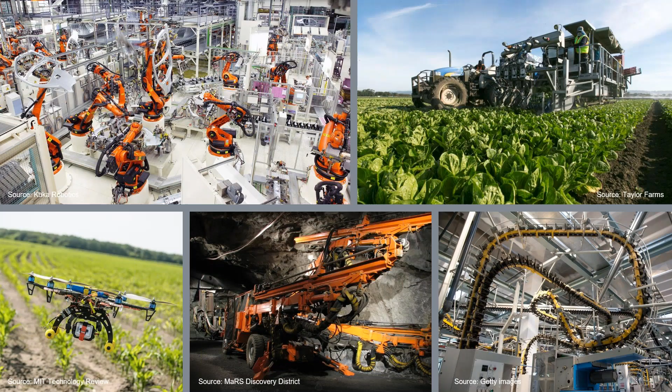I'm going to talk about why massive shifts we think are almost inevitable now, and why the construction industry has to move towards a more manufacturing-like approach, and what we think that might look like. I'm sure everyone's aware of all the problems with construction: chronic lack of productivity, aging workforce, all these sorts of things. We find it frustrating that ours is literally the last industry after agriculture, manufacturing, mining that still just throws thousands of people at the problem in terrible conditions with chronic low productivity. There's a huge number of mental health problems in the construction industry. So we think it's time for a fundamental shift.

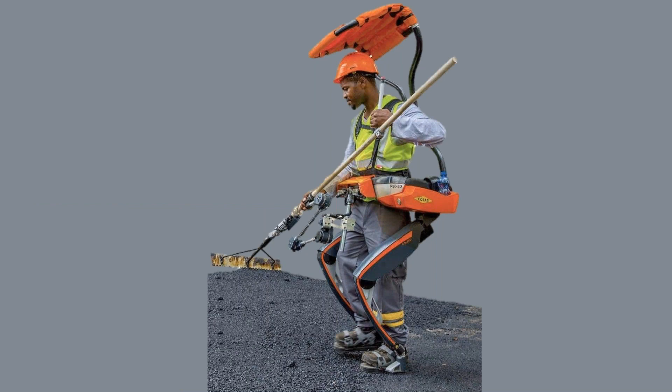Lots of people are looking at this, but I think a lot of people are trying to deploy automation to the things that we already do. So someone's actually putting a huge amount of effort into making a slightly better version of a man with a rake, and you go, surely that can't be the best approach. At Bryden, we're more interested in not automating the things we do already—it's about starting to look at what we would do ideally if we were reinventing the construction industry from scratch, what it would look like, and how we would deploy automation to that. So it's looking at a slightly different aspect of automation, we think.

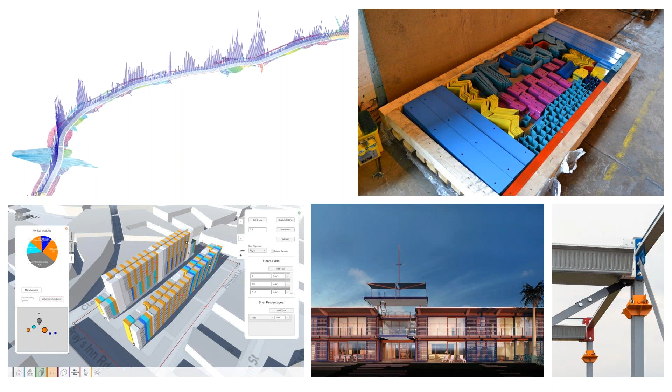Over the next half an hour or so, I'm going to cover why we need to look at automation differently, because we don't want to automate the wrong thing; why we think construction platforms, which I'll explain, are the key to unlocking this manufacturing-led approach; why we need to change the design process to facilitate that; how that might manifest itself in the built environment; and I'll touch on how automated assembly might then be deployed on site to make sure we don't lose the benefits of some of the good work we do in the early stages of projects once we actually get onto site.

At Bryden, we've spent 24 years looking at this problem. We were specifically set up to look at what a more manufacturing-led industry would look like, and how do we get some of that best practice, the year-on-year improvements in productivity, quality, safety, into construction.

This is a snapshot of a range of different design for manufacturing assembly approaches we've taken. There's no one-size-fits-all approach. There's a whole mix of systems here, from volumetric to panelized, componentized systems. We work with a range of materials: steel, concrete, timber, cold rolled steel. There's no one methodology that's the right methodology that will crack all of this. There's no one material, wonder material that's going to solve these problems. It requires a range of techniques and approaches, but we're starting to converge on what some of those would look like.

We would now confidently say to clients that we will take 30%, 25% out of cost. We'll take 25% off programs. We've got massive amounts of metrics now to demonstrate that there is a much, much better way of building, of delivering assets.

So the obvious question is, if it's such a good idea, why haven't any of these systems or solutions already transformed the industry? Why are we still talking about it?

People very often go to automotive and use that as an example of best practice. There was a 27-year gap between the first cars getting patents and the actual massive adoption of cars. The first cars were manually made—luxury, bespoke items. They did absolutely nothing to transform the industry. The big shift came when Henry Ford started to deploy mass production. At that point, the time taken to make a car plummeted, the cost of a car plummeted. That was the huge shift that suddenly transformed the industry.

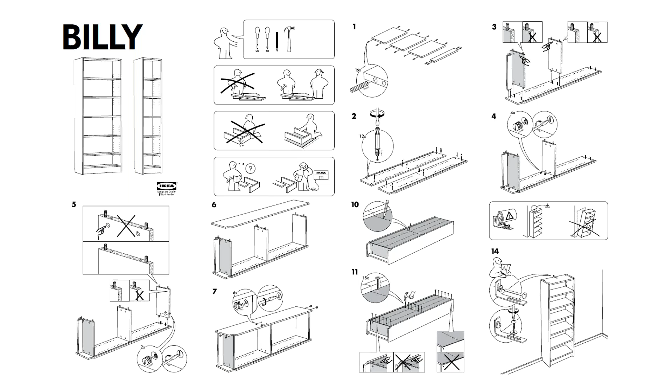So I think there's loads of talk about off-site at the moment, which I think is good. It's a step forward in the conversation, but I don't think the answer is necessarily all about off-site. I think we should be looking at massively increasing productivity on site. Our final point of assembly is the construction site. That's where we need to be putting a lot of effort, because if we're building factories and things to build our buildings, we're just introducing more steps in the process, transportation, logistics problems, and a whole level of additional complexity.

So this is why we've started to take the various systems that we've developed over the years and converge them into flexible kits of parts that we call platforms. We've deliberately stolen the term platforms from the software industry, and I'm sure everyone knows the car analogy. So BMW, VW, all of those guys have a common chassis on which they deploy different wheel sets, different engines, different interiors. So they get a massive level of mass customization, whilst also harnessing complete standardization. The components and the processes are always very standard, but they can still get high levels of flexibility.

My actual favorite example of a platform that's had a big impact is the shipping container. In 1956, Malcolm McLean invents the shipping container. The first shipment that moved things in a multimodal container, the cost of shipping dropped by 95%, because prior to that it was an incredibly manual process. You would move things from the warehouse to the dockside, from the dockside onto the ship, off the ship, etc.

What the guy did next, I think, is fascinating. So he open sourced the twist locks at the corners, which is the thing that really makes the system work, and all the dimensions. People thought he was crazy because he was sitting on a potential gold mine, but his view was, if I give this stuff away, I will own a much smaller slice of a much bigger pie.

What he didn't see coming was then you get ships and docks and cranes and software. You get a whole digital, physical infrastructure that makes this work incredibly well. The result is that we have a global economy, supply chains are very long, global diversity, global economics works much better. So that was a little piece of standardization, a bit of open sourcing, and it's fundamentally changed the economics of the world. So I'm not saying we can necessarily have that impact immediately, but I think that's the sort of thing we should be emulating.

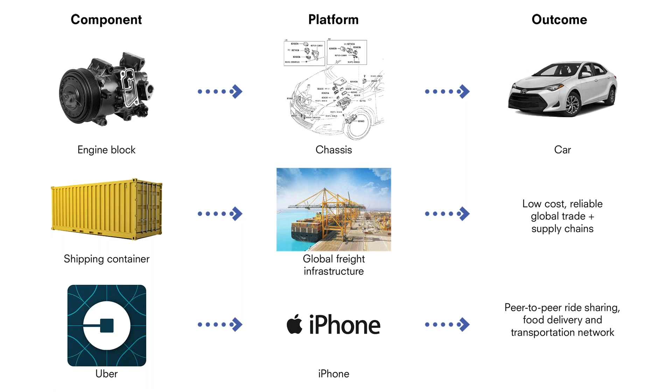As an industry, we think too much in terms of sectors. If you started to unpick the fundamental DNA that underlies these buildings, there's not a huge amount of difference. Our guess was that a small scale platform, mid-span platform, and large span platform would do most of government procurement. We've since proven this by overlaying the real pipeline of spend, and we're demonstrating that billions of pounds worth of construction could be done with a really small number of components - which would instantly get you into the sorts of numbers that manufacturing talks about, and transform the way you think about these things.

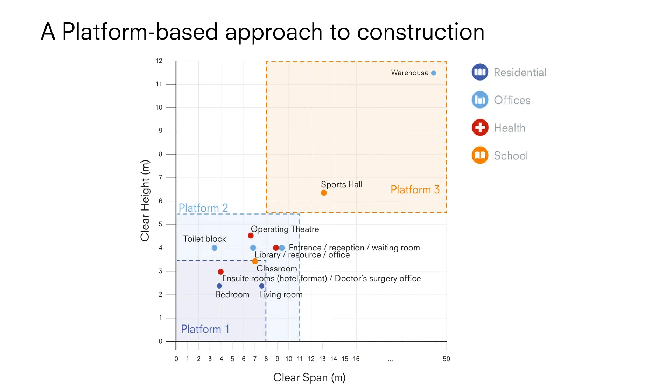So government has now really clearly said platforms is what we're doing. The Construction Innovation Hub is how we'll deploy it, test it, and scale it up. I think that's a fantastically good news story - despite everything else happening in politics, government's been incredibly consistent in its message. It's been putting more and more granularity behind the message, saying very clearly, this is what we're planning to do as we deliver the public sector spend.

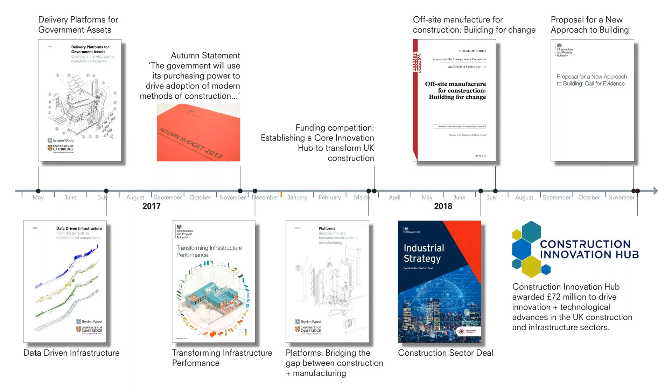This was an excerpt from the IPA document. It says: digitally design components for multiple types of assets and apply them wherever possible - for example, a single component used for a school, hospital, or prison building. So they've taken this on board and are really moving it forward now.

One thing I found interesting about this call for evidence - it wasn't saying, we're looking at platforms, I wonder if that's a good idea, what are the risks, what are the benefits. It seemed to be saying, we're doing this, you have an opportunity to join the debate, but we're going to be doing it - which I think is a very strong position. It amazes me that people haven't picked up on this as much as perhaps they should have done.

You can see here the key principles: design for manufacture, use a platform approach, and open for manufacture, use and procurement. One of the things we've promoted is this idea of open sourcing - making this stuff as widely available as possible, just as they did with the shipping container, lowering the barriers to entry. The more people get behind it, the more people get the benefit, and the more you build this momentum. So we've actually developed and tested a number of these platforms now.

I talked about the three types: small, medium and large scale platforms. We've actually physically built and tested them all now. This is platform 2 - bottom right, you can see the finished superstructure. It's not unusual in any way: steel beam, steel columns, concrete slabs. The end result is really, really normal - there's nothing unusual about it, no strange materials, no strange manufacturing techniques. So the end result is actually pretty standard.

The way it gets there is very different. If you buy a box section from Tata Steel, say, it's about £800 a tonne. If you buy a fabricated steel frame, it's about £2,500 a tonne. The thing you wanted was the performance of the steel, but the thing you pay for very often is all the transactional costs, logistics, movement, fabrication, and double handling from the manufacturer all the way onto site and into final assembly.

So we literally buy square hollow sections and have them brought to site with one hole punched or laser cut. On the left-hand side, you can see a set of standard brackets we use for all the connection points. There's only a limited number of bracket types, but they do every connection: base connection, beam to column, end joint, etc. The first time we bought these brackets, they were about £8,000.

The next time we bought them, we got them from a very small, local company who specialise in CNC laser cutting, who did them half price. So we're now buying commodity things like box sections direct from a manufacturer, brought to site. We can buy the highly fabricated components from a super wide, resilient SME, very local supply chain, have them brought to site, and then these are assembled.

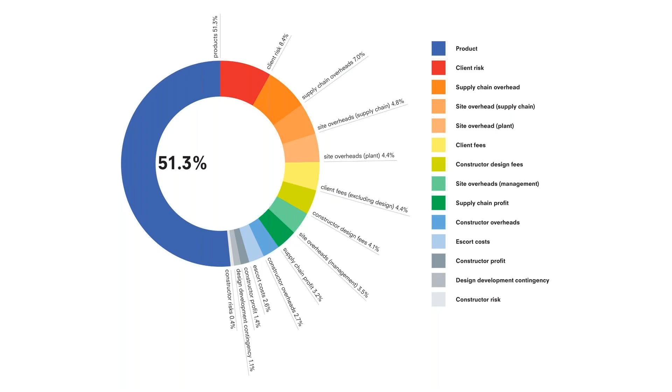So Turner Townsend did a piece of work. They weren't involved in the design of the platforms. They came and did an objective analysis for us, firstly because obviously they bring a huge amount of experience, and secondly, having that objective testing meant that they weren't subject to maybe the optimism bias that we might have had.

But they came back and said, looking at the benefits of this, there's up to a 33% reduction in capital cost. We're assuming, by the way, that whole life cost is better anyway because of the performance of the buildings and all the rest of it. But if you can win the capital cost arguments, you don't even need to talk about the whole life cost.

So we're not suggesting we would take 33% day one. What it means is there's a huge amount of benefit that could be returned to clients, and a huge pot of cash that's available for training and upskilling and all the things that need to happen to make this work.

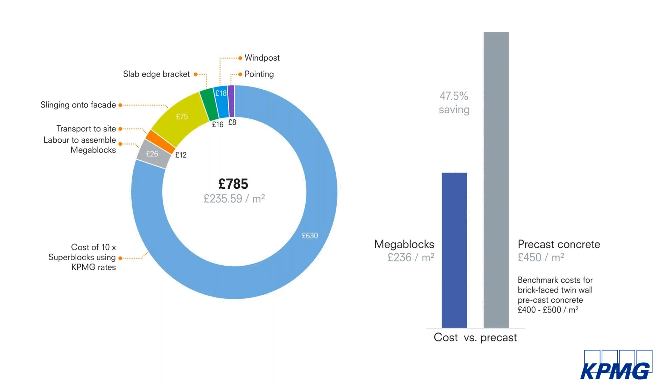KPMG did a similar study on one element, the facade system that we developed for the MOJ. You can see here their numbers compared to traditional precast - this facade system is about 50% cheaper. At the same time, it was tested by Prison Industries, so you get 50% cheaper facades, while at the same time creating new jobs, creating new skills, creating opportunities, helping to rehabilitate, all the rest of it. So you get massive cost saving with huge social returns.

So how do we do this? I've talked about open sourcing a few times. We have this written into our contract with the government.

Anything we design for them, they instantly get a completely free license to do with whatever they like forever. So we're effectively open sourcing all of this. Our view is that there's no point us doing this for our clients and retaining the benefit - we need to make this available. The Construction Innovation Hub will help us take the things we've already developed, put behind them the proper warranties, manufacturing processes and certainty, and then give it to the world. It's a phenomenally exciting time coming where lots of people get access to this stuff, and people who couldn't necessarily invent the system from scratch could deploy it and start to get into those sorts of numbers we've talked about.

We're talking about much closer engagement with the supply chain. When we did the platform 2 superstructure, we point cloud scanned it, and the furthest anything out of tolerance was 3 millimeters - so we're talking a 2-3 millimeter tolerance, and that was a bit of an outlier. There's loads of innovation in the facade supply chain, but half their life is spent fixing the gaps between their millimeter-perfect unitized or precast systems and the wobbly traditional frame behind it. As soon as you get into that level of precision, loads of really good practice in the supply chain instantly comes to the fore.

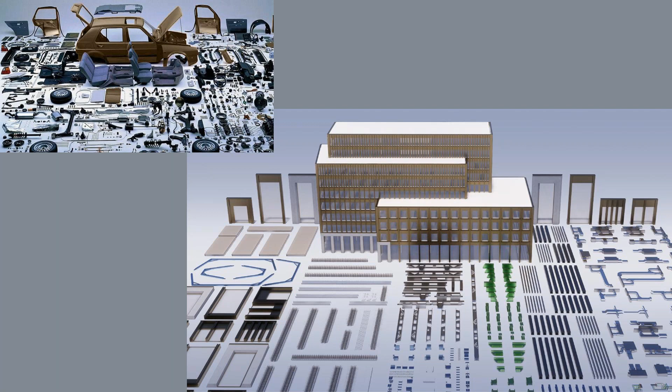The fact that we're now having discussions between major clients and very small manufacturers means we're starting to close down all these long, transactional supply chain relationships. We're starting to bring manufacturers much more closely into the conversation.

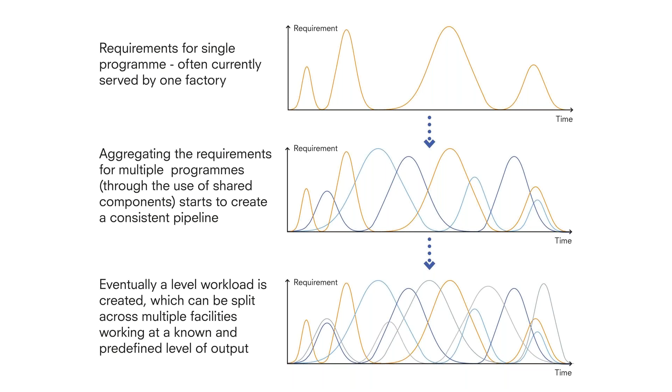If government did this, it would start to get the economies of scale everyone would like to get their hands on. Manufacturers, if they could see a consistent pipeline, would have the confidence to gear up, to invest, to meet people halfway. Pipeline is one of the things that always gets talked about - we think this is a way of achieving that pipeline. Even the major programs, even Heathrow expansion and the like, don't have a long enough, persistent enough pipeline to change the industry. But if we start buying these things centrally, we start to get the kind of persistence we need.

Logistics is going to be a huge thing for lots of the big programs moving forward. If you buy a volumetric solution, you can get about 110 cubic meters, give or take, on the back of a truck. We can fit about 5,500 cubic meters worth of superstructure for Platform 2 in a single 40-foot shipping container. So if you're HS2 Euston, or Heathrow expansion, or any number of other major projects, you are all about logistics. The fact that this is designed for few vehicle movements, very controlled logistics, brings immediate benefits.

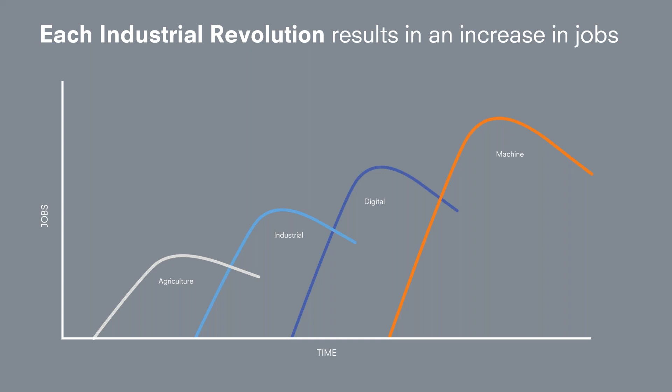One thing people often ask is: why aren't you doing people out of jobs with these new ways of working? Actually, what's persistently happened through history is that every industrial revolution loses certain jobs but creates more new types of jobs. Given the problem we've got - a massive skills gap, an aging workforce, the IPA talking about £600 billion investment in the next 10 years, and the UN talking about 2.5 billion more people living in cities by 2050 - our problem is not that we're going to do people out of jobs. Our problem is we don't have anywhere near enough people to keep up with that pipeline. If we don't start doing things in a radically more productive way, we simply can't keep up with the infrastructure needs the world has.

So the problem is that we need to start adopting these things and find new ways of working. That leads on to automated design. If we have these digital components that understand how they relate to each other, it means we can start to use the rule sets and start to automate the design process.

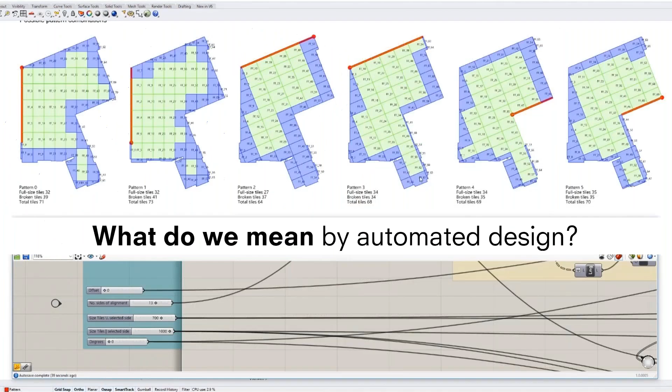So what do we mean by automated design? There's lots of iterations or versions of this. This is where we think we're heading. One version is we could use these rapid tools, start to automate things, use Dynamo and script lots of our tasks now. One version of that is to do the same thing but quicker, which is fine and a good use of the tools.

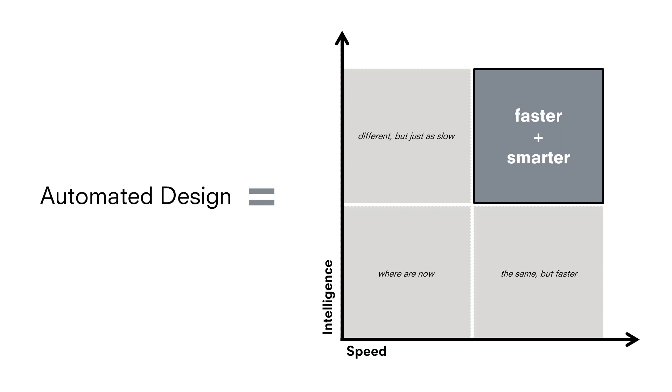A more interesting thing, we think, is to do a quicker thing but also a different thing. So if you knew you were going to use these design tools and start to automate, maybe you would do something fundamentally different.

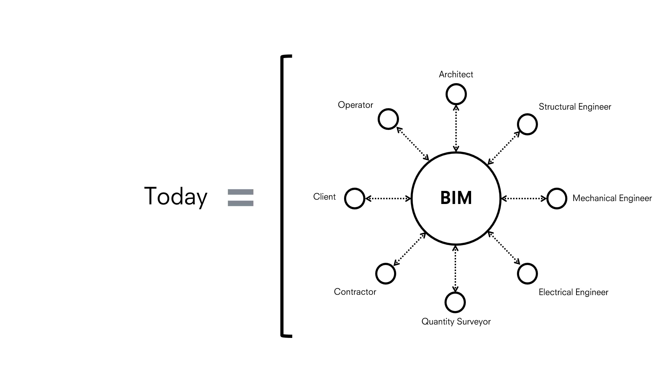I'm sure everyone's seen a version of this slide. Currently, BIM is the kind of central single point of truth, the central model around which everyone views. We think it was a fantastic start to a conversation, but BIM was never meant to be the destination. It was a direction of travel. Now that the industry has broadly adopted BIM and people are starting to really use it to its potential, we're ready for the next view of it.

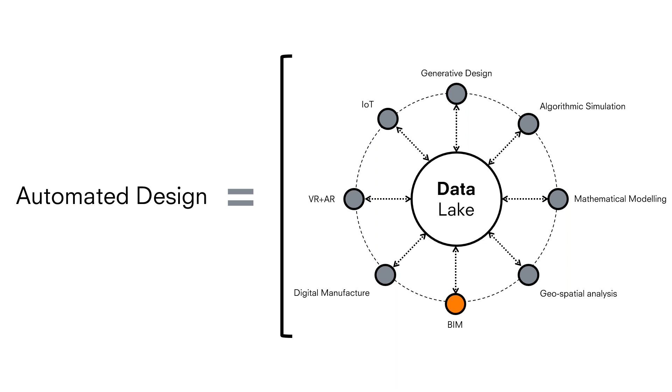We think the future will be BIM as one of the lenses through which people start to use big data. We're going to start to use generative design, algorithmic simulation, mathematical modeling. So BIM has been a stepping stone onto a path of greater digital transformation, and I think these tools are going to get better and better, and our toolbox of design capabilities is just going to get bigger.

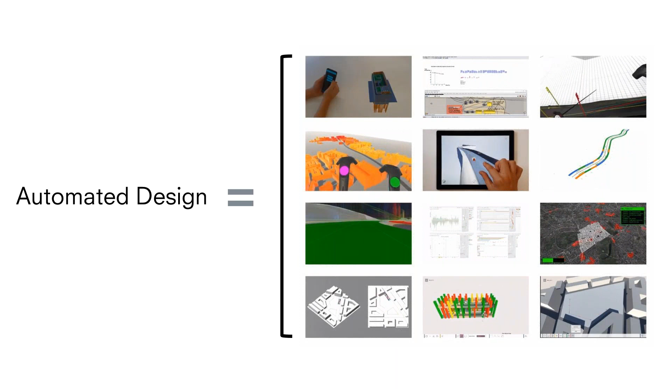So we have a team here, a creative technologies team, who spend a lot of their time developing specific apps for clients, trying to find ways to use these digital tools more productively and create better design solutions.

I'm not going to talk through all of these. There's a number of things we're working on at the moment. One's a configuration tool for prefabricated schools. We're going to publish that, I think, next month, but we're going to open source it and publish the code. It'll be a web-based workflow, so you won't need to buy the software.

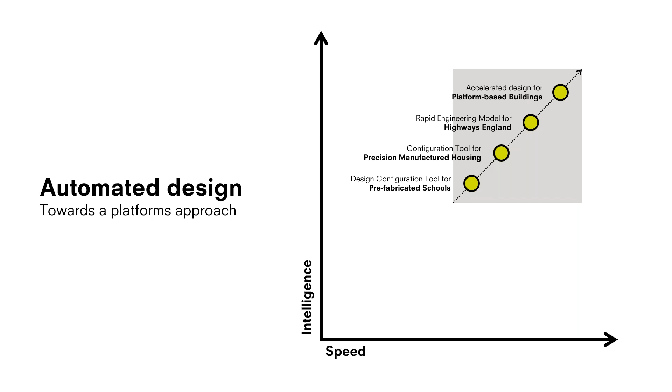We're doing the same thing for GLA in London for precision housing. That's going to get launched end of June. Again, we're publishing it and making it completely available. We've also done a piece of work for Highways England which I'm going to talk about, and I'll show you where we think some of the end state of this is heading.

So this is a piece of work we did for Highways England. It started out as the initial ask to create a BIM library for the Smart Motorways programme. But working with the Smart Motorways team, we found there were loads of opportunities for more digitally enabled ways of working.

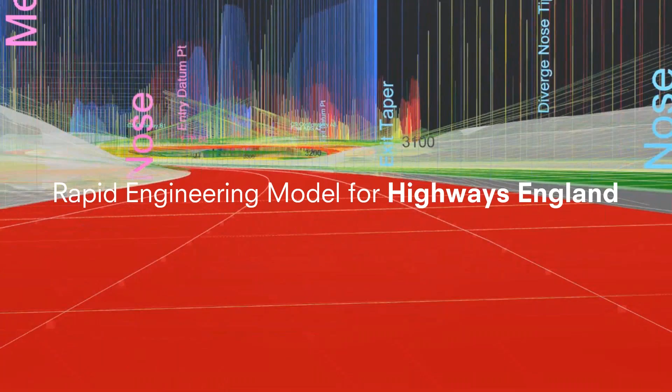We found, for instance, that the gantries were designed from scratch each time. So somebody created a parametric model that, as you place the gantry and size it, automatically sizes the structural elements. We then taught each of the different assemblies, like emergency refuge areas and gantries, how they related to each other. We then took the highways technical standards, codified them, and put them into an algorithm.

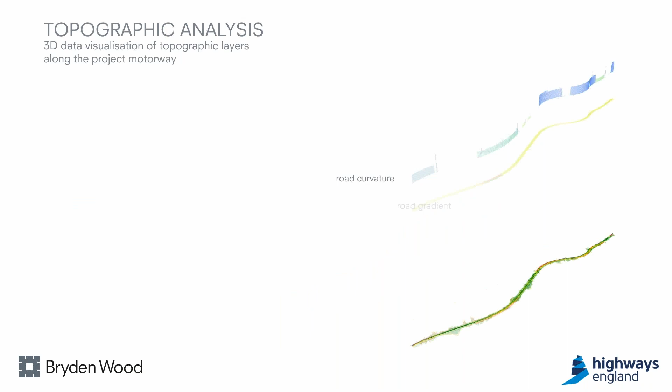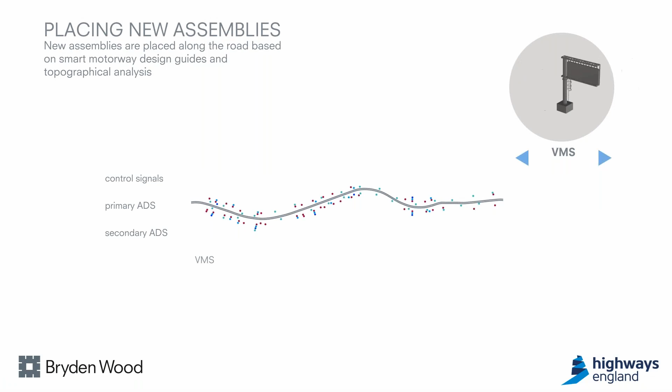We're now at a point where we have an algorithm which takes a stretch of motorway. You tell it which bit you're interested in, it pulls that out, and automatically analyzes it for a number of features, according to curvature, gradient, width, visibility, all the rest of it. It then gives you an automatic score saying how readily adaptable this stretch of motorway is as a smart motorway.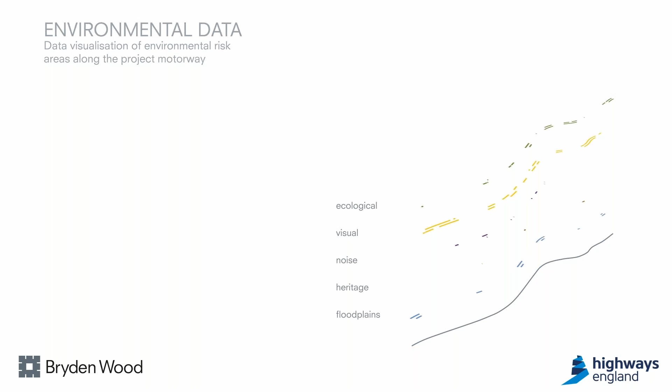Then, because it knows what context each component is looking for—so an emergency refuge area wants to be on a long straight piece of road without too much gradient—it places all those components, optimizes them relative to each other, then analyzes it for all of these environmental things, tweaks the positioning of the components, and spits out an incredibly quick but reasonably accurate, or very accurate, early stage design for your smart motorway, which you can then take out, analyze, and test the positioning of it all.

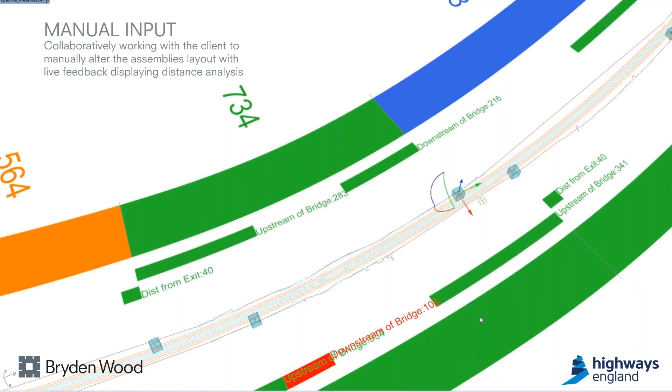Every time we do it, if we find a problem, we don't correct the model, we correct the rule set, and it gets better and better and quicker and quicker. It generates a huge amount of data for different stakeholders. You can automatically drive down the road, etc.

This is the workflow which has changed the way Highways England think about the design process. It's about 95% quicker than the human teams for the same stage. Again, that's not doing lots of people out of work. It's now freeing up a load of design time for people to spend on the really complex bits, which are all the junctions and the interactions, which are very, very hard to write an algorithm for. So we're not deploying fewer people, we're deploying the same people to do more creative work or put more effort where they should have it.

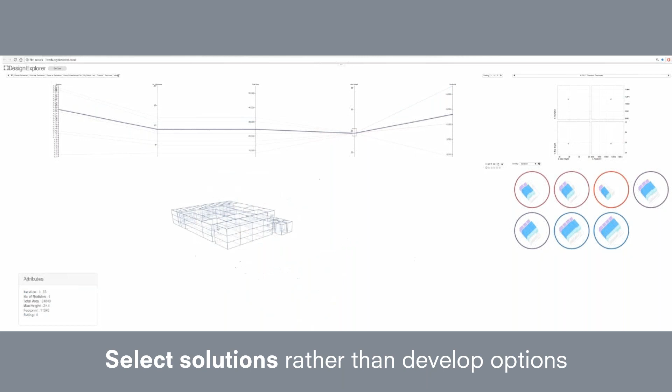This is our tool set we're developing for platform buildings. Where we have repeat clients, we're able to generate a whole range of solutions for them. Rather than design one or two concepts, we can now create every single concept that works within the rule set. And we can then pick from a range of solutions and say, which one takes up the least site, which one requires the least amount of access, all the rest. Rather than design one or two concepts and test them, we're now picking from a range of every concept you could have on a site.

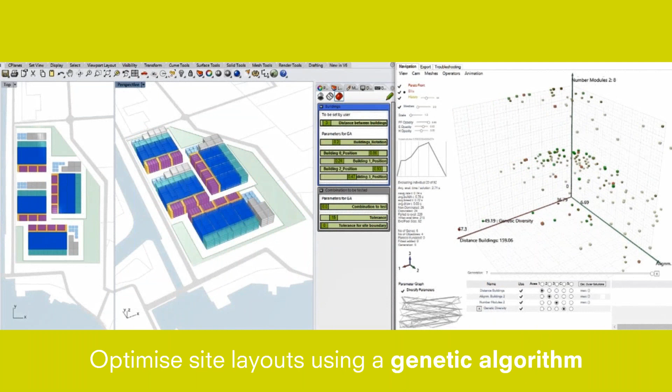We use a huge amount of tools like Dynamo to automate some of these things. We can then deploy machine learning on top of that to output a whole range of different solutions and start to learn which one's the best. Once we have those models, we've got another set of algorithms that take the model and start to automatically create the BIM models straight out of that rule set.

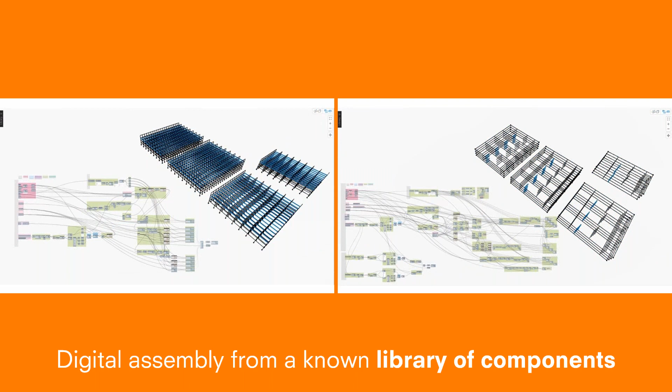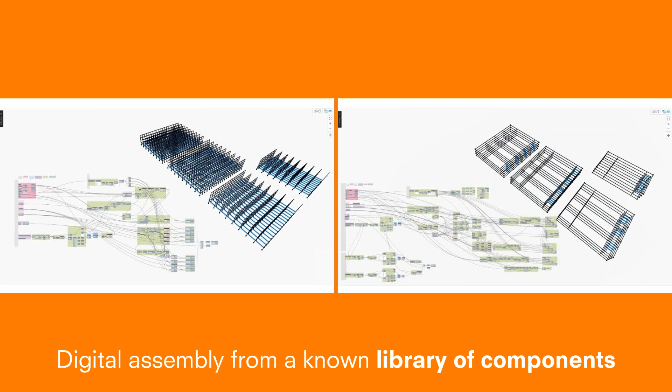You can see the speed with which we can now go from a brief to an optimized site layout to a fully quantified, fully manufacturable model is incredibly quick. What it's doing is allowing us more time to spend engaging with the client at the front end, really understanding the problem statement, really understanding where we can add value. So increasingly we're changing our value proposition and spending more time on what we think are creative, value-adding steps.

This is leading us to a whole range of different solutions. As I say, we think platforms is the key thing that's enabling all of this convergence of manufacturing, construction, automated design, but without compromising on architectural quality. Just as the automotive industry does a very good job of mass customization, we think there doesn't have to be any compromise between architectural quality and the adoption of all of these advanced tools. In every other sector, we associate automation and manufacturing with high quality design, with beautiful looking things in phones and cars. It should be exactly the same in buildings.

I think we're starting to see a shift in people's perception. I think people are recognizing that actually traditional build quality isn't fantastic. Use of this sort of manufacturing technique should result in very, very high quality, beautiful, high performing buildings. But the key to that, we think, is design.

It's all about design. So very often we hear this term design for manufacture and assembly talked about as the product. I think people forget that it's the process. So if you wanted to manufacture and assemble your buildings, you would design them differently. This isn't diminishing the need for design, it's just a different type of design, but it's a much more holistic approach. Architects used to be the master builders, so we think this is quite an opportunity for people to reframe what design looks like in terms of our assets.

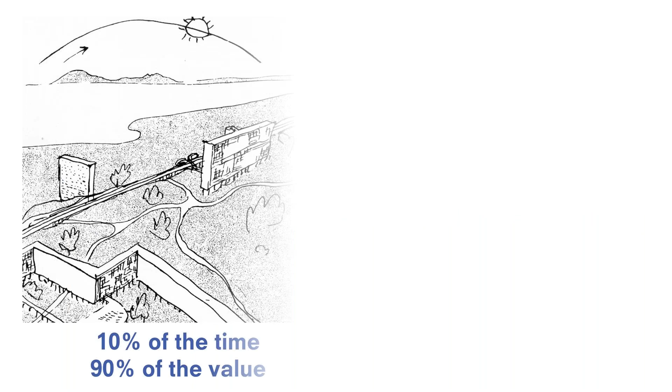The most value-adding thing a person can do is have the idea, develop the concept. That takes a fraction of the time, but it's the real value-adding step. The thing we currently get paid for is documenting that idea, so we get paid for drawings and deliverables and documents and all the rest of it. The stuff on the right-hand side is about to evaporate.

You can see from the tools we're talking about, the time taken to develop the design, create the model, etc., is just disappearing, which is fantastic news in some respects, because it's given us more time to spend on the front end, but the commercial model hasn't caught up with that yet. So I think there are some really big shifts coming around the use of automation. I don't think we have all the answers yet, but it's a conversation that I think as an industry we should be having.

My fear is that we will take all of these fantastic new technologies, all these fantastic new tools, and we'll end up designing things that look like they were made in really traditional ways of manufacture.

If you look at the history of architecture, actually it's one of technology. We couldn't build tall buildings until we got the hang of using steel in a particular way. We couldn't build them much higher until we got the hang of lifts. High tech was a response to using glass and steel in a particular way.

So I think the conversation we should be having is, if we were using these tools, these manufacturing techniques, if we were bringing all this stuff to bear, what would it look like? I don't think there's any reason to expect that the buildings of the future need to look like the buildings of the past. I personally think there's a really exciting opportunity now to say, well, if we started to really deploy all these tools, what does our built infrastructure look like?